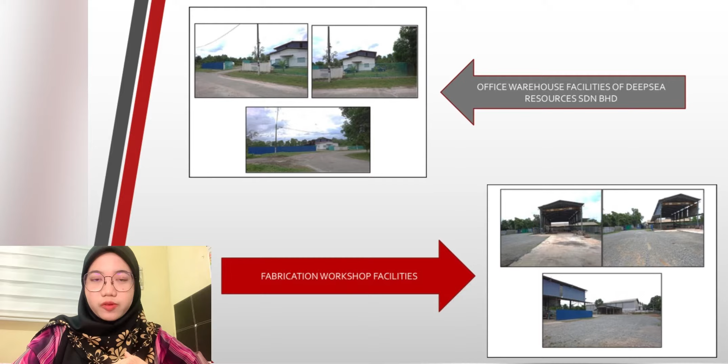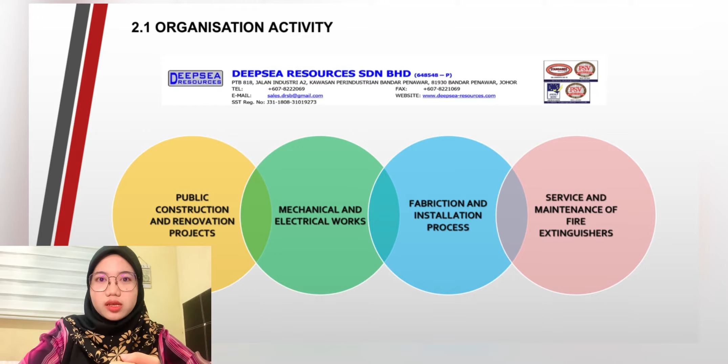Next, this is the organization activity of Deepsea Resources Sdn Bhd, which includes public construction and renovation projects, mechanical and electrical works, fabrication and installation process, and service and maintenance of fire extinguishers.

Next, this is the vision and mission of this company. The vision of Deepsea Resources Sdn Bhd is to be a diversified business that creates value while developing intellectual capital and continuous improvement for our employees and organization.

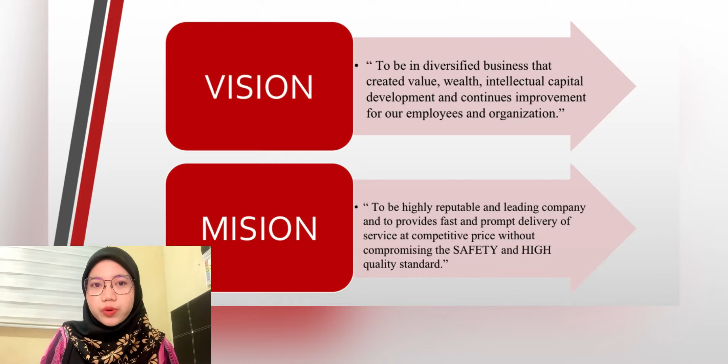The mission of the company is to be a highly reputable and leading company, and to provide fast and prompt delivery of service and competitive price without compromising safety and high quality standards.

Then this is the organization chart. The managing director of Deepsea Resources Sdn Bhd is Encik Rostam Mohd Nor, and the director finance admin manager is Puan Norazimah binti Othman. Next, the consultant professional engineer is Ir. Kamariah binti Ibrahim.

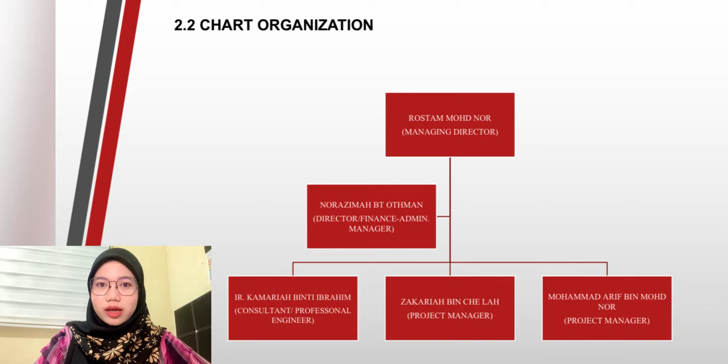Next, the project managers are Encik Zakariah bin Che Lah and Mohammad Arif bin Mohd Nor.

So next, the following is a summary of the weekly activities that I have done during my industrial training at Deepsea Resources Sdn Bhd for 20 weeks, starting from 1 March 2021 until 16 July 2021.

First, I want to explain the tasks I did from week 1 until week 13. I started my industrial training by reporting at Deepsea Resources Sdn Bhd, and the tasks given to me included updating the summary progress reports.

Cutting plates using a semi-automatic plate cutting machine, measuring the eser iron plate, updating the fire extinguisher inspection report, testing the functionality of the fire hose reel, making welding on plate for column, and ordering a fire extinguisher using the eFEis system.

Marking and measuring hollow iron, leveling and cutting the iron plate, marking and cutting iron to make truss, checking the quantity of the material list that has been completed, checking the size of the material that has been completed.

Making welding on hollow iron for truss, punching a hole in the iron plate, measuring and marking the size of the hole on the iron plates, making tagging on aluminum plates according to code numbers with different quantities of materials.

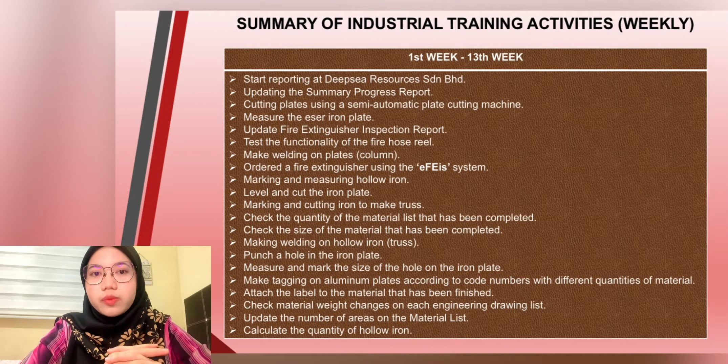Attaching the label to the material that has been finished, checking material weight changes on each engineering drawing list, updating the numbers of areas on the material list, and lastly, calculating the quantity of hollow iron.

The following is from the 14th week to the 20th week, which is from 1 June 2021 to 16 July 2021. During this period, Deepsea Resources Sdn Bhd did not carry out any activity for mechanical construction projects.

This is due to the government's directive to implement the full closure of the social and economic sectors. In this regard, Deep Sea Resources obtained registration confirmation under the system of the Ministry of International Trade and Industry, MITI.

Deepsea Resources Sdn Bhd was allowed to operate as usual by only carrying out oil and gas repair and maintenance work during the PKP period, which was from the 14th week to the 20th week.

Among the tasks I did are updating the summary building PRPC report, updating the fire extinguisher service report, ordering a fire extinguisher using the eFEis system, and calculating the amount of equipment and the quantity of hollow iron.

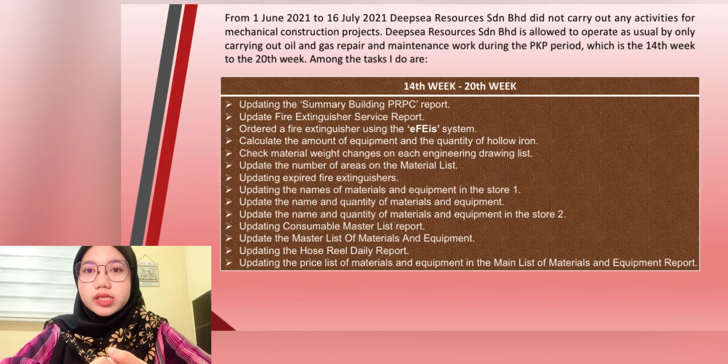Updating the name and quantity of materials and equipment in store 2, updating the consumable master list report, updating the master list of materials and equipment, updating the hose reel daily report, and lastly, updating the price list of materials and equipment in the main list of material and equipment report.

Next, description of industrial training activities and projects. First, workshop and store management involves calculating the quantity of goods and equipment, then calculating the amount of hollow iron remaining and needed.

For fire extinguisher maintenance: update the service report of the fire extinguisher inspection system, test the functionality of the fire hose reel, update the address for the location of fire extinguishers, and update the report of building summary PRPC.

For welding skill and hand tools: making a welding on the column, making a welding on the hollow iron, measuring and cutting iron plates, marking and measuring hollow iron, leveling the iron plate, checking the size of the completed structure, measuring and drilling holes on iron plates, and making the tagging on the plates.

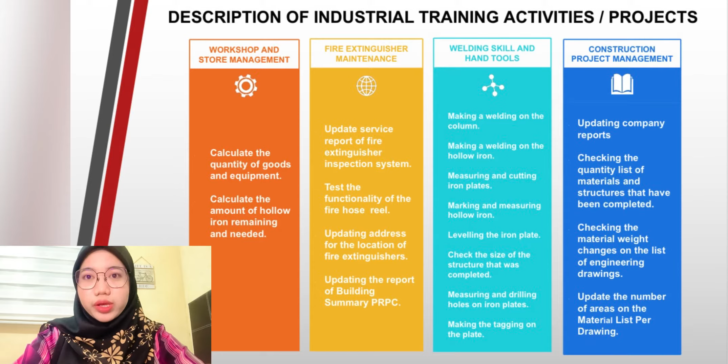For construction project management: first update company reports, then check the quantity list of materials and structures that have been completed, check the material weight changes on the list of engineering drawings, and update the number of areas on the material list per drawing.

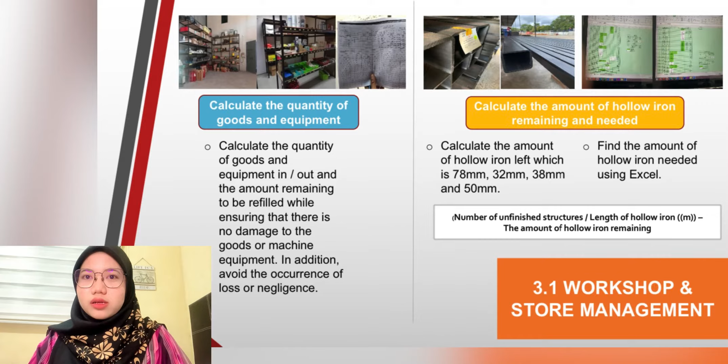Calculate the amount of hollow iron left, which is 78mm, 32mm, 38mm, and 50mm. I found the amount of hollow iron needed using Excel.

So next, for fire extinguisher maintenance: record all the in and out of the goods used, supervise the goods store, as well as check the needs of the goods that have been used up or damaged to make a repurchase from the supplier.

Make calculations in the store to calculate the stock of goods. Organize and update the stock of goods. In addition, update the file for the development of inspection service of firefighting for the PRPC, PCP, and RGTP projects at the end of each month.

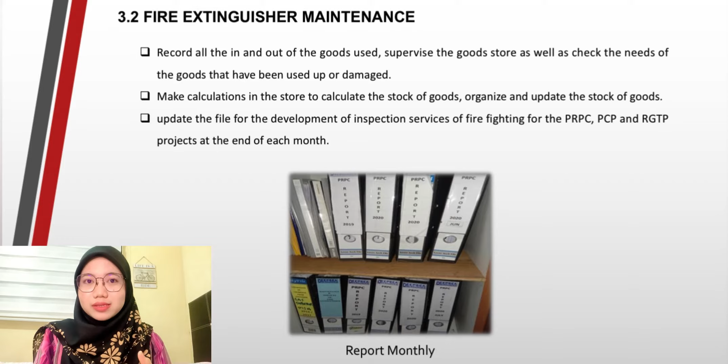And this is the monthly report. Okay, this is fire hose box.

Fire hose boxes are usually placed in strategic places near buildings or power plants to provide an easily accessible and controlled water supply to put out fires.

Fire hose boxes contain a hose and spanner. The system is operated manually and requires good control.

The hose is capable of flowing water up to 30 meters. The pressure of this system is controlled according to the pressure of the pipeline provided in the surrounding area. The shower can reach a height of up to 10 meters.

And this is the steps of fire hose box operation, which has 10 steps. The first step is to open the fire hose box cover.

Step 2, remove the hose from the fire hose box. Step 3, remove the hose and wrench from the plastic. Step 4, place the hose on the shoulder of the road to maintain safety while working. Step 5, clean the hose with a damp cloth.

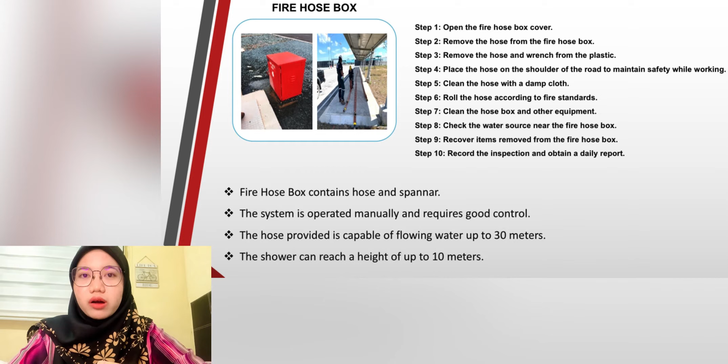Step 6, roll the hose according to fire standards. Step 7, clean the hose box and other equipment. Step 8, check the water source near the fire hose box. Step 9, recover items removed from the fire hose box. Step 10, record the inspection and obtain a daily report.

For fire extinguishing, inspection shall be done once every 3 months by the user himself and once a year by a qualified party. Inspection and maintenance are performed on cartridge type fire extinguishers only, while the stored pressure type is supplied directly from the company or supplier agent.

There are 2 types of fire extinguishers: dry powder fire extinguisher maintenance and water type fire extinguisher maintenance. For the dry powder fire extinguisher maintenance, there are 5 steps.

The first step is to remove the flour if the lumps need to be replaced or sifted again, and weighed. Step 2, clean the cylinder. Step 3, clean the discharge tube and nozzle. Step 4, check the cartridge. Step 5, when ready, close tightly.

For water type fire extinguisher maintenance, Step 1 is to open the head cover and remove the cartridge.

Step 2, weigh and replace. Step 3, wash the cylinder and add new water. Step 4, check the discharge tube to make sure it's not clogged. And lastly, Step 5, replace the head cover.

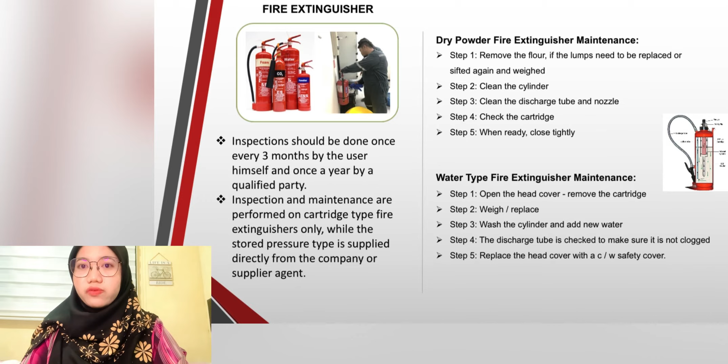With a c/w safety cover. Next, this is construction project management. Deepsea Resources Sdn Bhd also carries out fabrication and installation works. Fabrication is the process in which the unification of different structural steel parts is produced. The parts are then welded, assembled, or connected together. The entire fabrication process is considered to make steel structures, machines, and other components made of structural steel. The time frame for this project is estimated at 3 to 4 months.

Therefore, the company strongly emphasized that project management and records are constantly updated, and employees must give a commitment so that the project can be completed within the stipulated time.

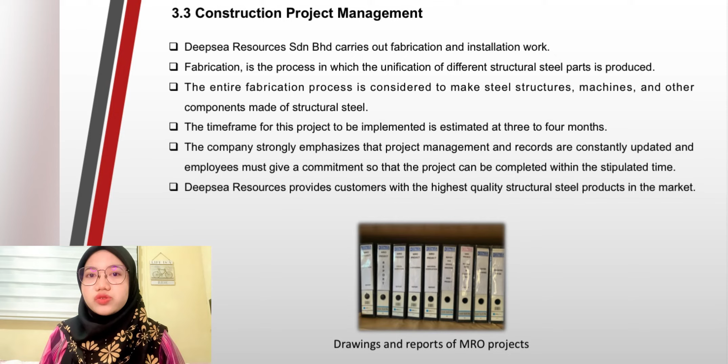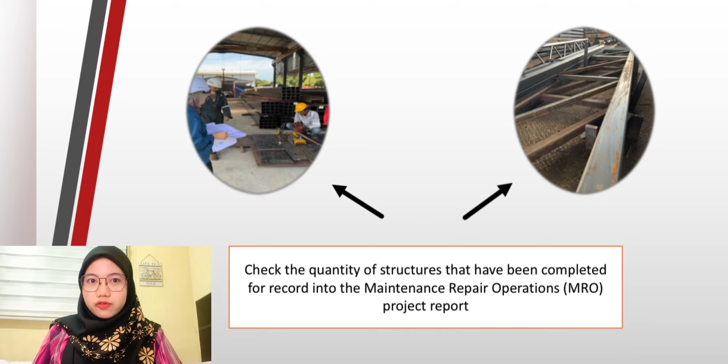Deep-sea Resources also provides customers with highest quality structural steel products in the market. In this picture, I check the quantity of structures that have been completed for record into the maintenance repair operation MRO project report. This is hand tools and welding skills.

I was given the task of measuring using tape and cutting the iron plates using an angle grinder. And I make tagging on plates using aluminum plate, hammer, stamping metal punch, center punch, and iron wire to be labeled on the completed structure.

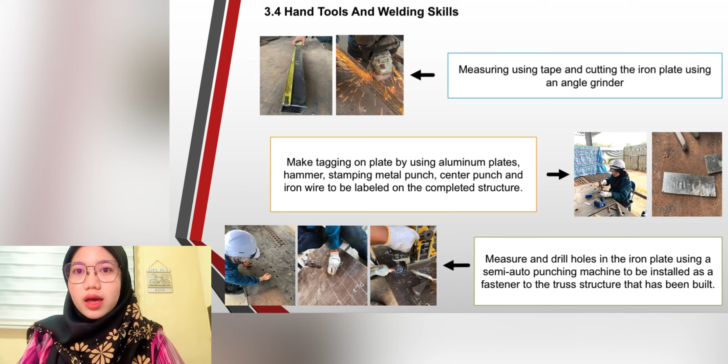Then, the third picture, I measure and drill holes in the iron plate using a semi-auto punching machine to be installed as the fastener to the truss structure that has been built. And then I am welding on hollow iron for truss and plate for column.

Next, I measure the hollow iron using an L angle before making a fit up to ensure flatness on the hollow iron you want to connect. And lastly, I grind the iron using a hand angle grinder to remove the iron droppings and make it flat.

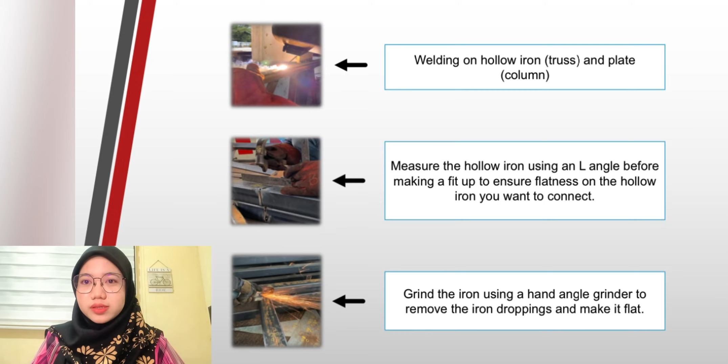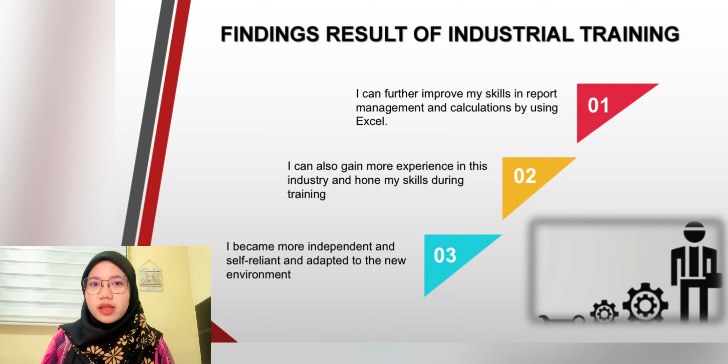So what do I get from industrial training? I can further improve my skills in report management and calculation by using Excel. Second, I can also gain more experience in this industry and hone my skills during training. And lastly, I become more independent, self-reliant, and adapted to the new environment.

The suggestion I want to give is that the industrial training unit should prepare a special schedule for trainees based on the firm placed. This is to smooth and facilitate the journey of industrial training. This can also prevent certain parties from trying to take advantage of trainees to facilitate their tasks.

Trainees should be placed in each division so as not to focus on one field only and be able to learn other things at the same time as the management of a firm. I hope that my suggestions and recommendations can further improve the quality of the existing industrial training and be more beneficial to trainees for the next generations.

Finally, close cooperation and relationship between the polytechnic and the firm is essential to form a beneficial relationship for all parties, including the firm, trainees, as well as the polytechnic itself.

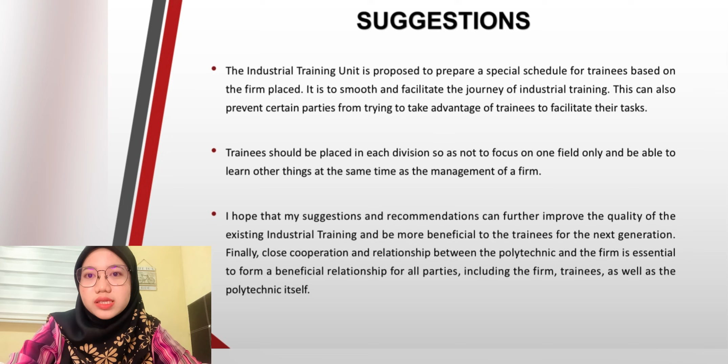In conclusion, after undergoing industrial training for 20 weeks, a lot has been learned from all aspects related to the career field, especially how to communicate with superiors and related parties. Working in the company, Deepsea Resources Sdn Bhd, to some extent teaches something in more detail and systematically.

In general, industrial training should be continued because it serves to provide benefits to trainees in terms of scientific experience before setting foot into the real world of work.

Industrial training is one of the mandatory conditions for the award of the Polytechnic Diploma Certificates of the Ministry of Higher Education Malaysia. During the industrial training, students are not only able to improve their skills in their respective field, but also students are exposed to the techniques of preparing and writing reports.

Through this experience, it is hoped to increase potential to stand out in the job market in related fields after graduation. In conclusion, planning and cooperation between institutions of higher learning and private industry companies as well as government bodies is very important to produce a skilled generation in the future.